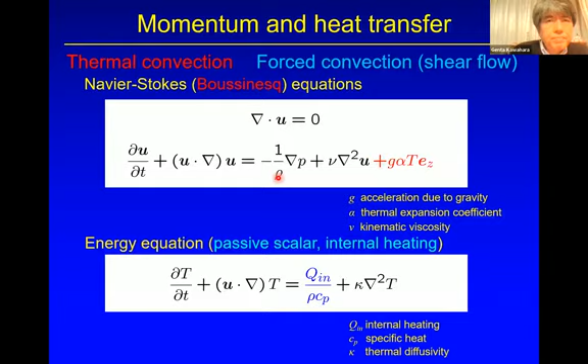And the energy equation, energy budget, is given by the equilibrium between buoyancy power and energy dissipation for thermal convection, and equilibrium between pressure power and energy dissipation for shear flow. These equations are obtained from the Navier-Stokes equation and energy equation.

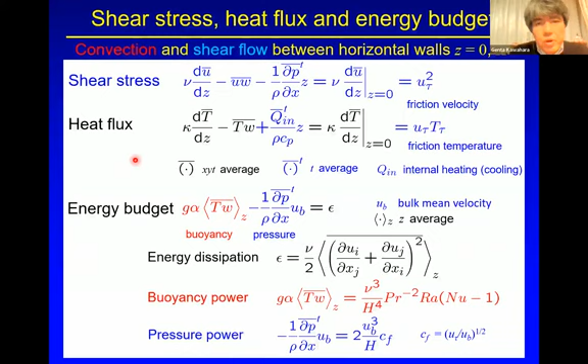And the buoyancy power is related to Rayleigh number and Nusselt number through the heat flux equation. And the pressure power is related to friction coefficient through the shear stress equation. We see similar expressions for shear stress and heat flux. This is the reason of similarity between heat and momentum transfer.

And now I discuss turbulent Rayleigh-Bénard convection. It is a thermal convection between horizontal plates, heated from below, cooled from above. The dimensionless parameter of this system is, of course, the Rayleigh number. And if we increase the Rayleigh number, we see onset of thermal convection and eventually fully developed turbulent thermal convection.

And in the turbulent state, we are interested in the Nusselt number, that is a dimensionless wall heat flux normalized with thermal conduction heat flux. As Srini explained yesterday, in the turbulent state, we see the scaling law of Nusselt number with Rayleigh number.

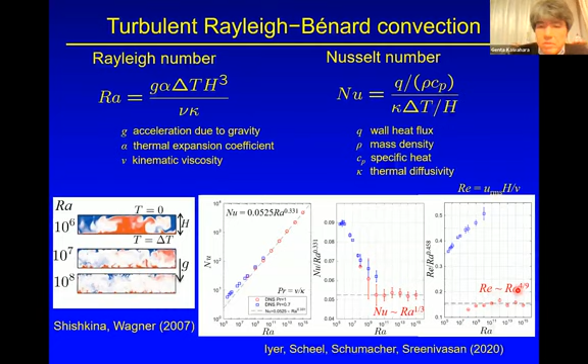The exponent is around 1/3 up to very high Rayleigh number. And we also see the scaling of the Reynolds number based on RMS velocity with Rayleigh number, the exponent of around 4/9. This is what we call the classical scaling, and this scaling has been widely observed in thermal convection, especially the canonical Rayleigh-Bénard convection between horizontal plates heated from below and cooled from above.

For this classical scaling, of course, we already have the theoretical interpretation. Here, we are going to briefly explain this scaling intuitively for the case of Prandtl number around unity.

In the near wall region, we see the thermal conduction layer, and we also have the viscous wall layer. In this configuration, we suppose that Prandtl number is around unity, so the thickness of the thermal conduction layer and viscous wall layer have comparable thickness, in which we see the significance of the effect of thermal diffusivity and kinematic viscosity.

So, in the energy equation, in this layer, we expect the balance between thermal diffusion and advection. And the same is true of the Navier-Stokes equation, or Boussinesq equation, in the wall normal direction. Viscous terms, advection terms, and in the case of the wall normal Boussinesq equation, we have the buoyancy term. They would be comparable in the near wall layer.

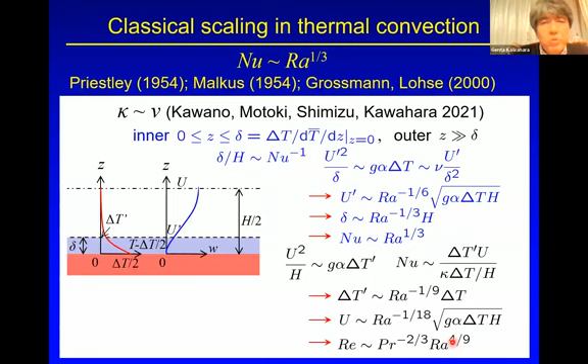This velocity scaling gives us a Reynolds number based on RMS velocity, which is also consistent with the classical scale. This is an intuitive discussion of the classical scaling, and this classical scaling has been observed widely in thermal convection.

On the other hand, there are rigorous upper bounds for the Nusselt number, given by Charlie and Professor Constantin, and by Plasting and Kerswell. In these bounds, we see the factor Rayleigh to the 1/2, and these bounds are much larger than classical scaling or experiments.

These bounds correspond to the so-called ultimate scaling suggested by Spiegel and Kraichnan at extremely high Rayleigh number. This scaling implies that heat flux scales with delta T times the buoyancy-induced terminal velocity, and it is independent of thermal diffusivity or kinematic viscosity.

Supposing this scaling, we consider the energy budget equation. We have Taylor's dissipation law, or dissipation anomaly: epsilon is independent of thermal diffusivity and kinematic viscosity.

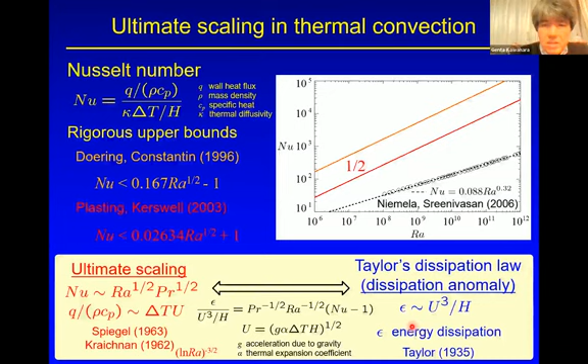The ultimate scaling, however, has not been observed in canonical Rayleigh-Benard convection. So how about convection between cooled or heated rough walls? In this case, we do see the ultimate scaling here.

However, if we further increase the Rayleigh number, what we see is a return to classical scaling. So I have to say that the ultimate scaling in this configuration is confined to a limited range of Rayleigh number.

Yesterday Srini mentioned the possibility of ultimate scaling, maybe in wall-less convection, or convection radiatively heated from below, where we observe ultimate scaling.

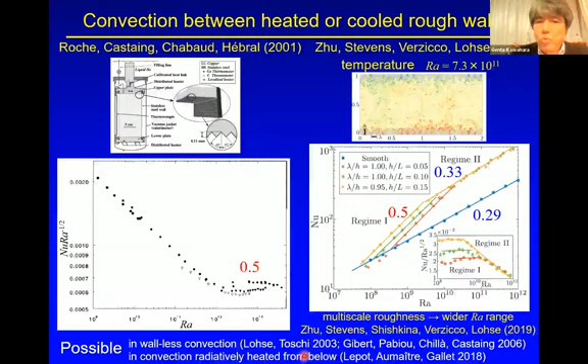But in this talk, I consider the possibility of ultimate scaling in conventional Rayleigh-Benard convection, heated from below and cooled from above between horizontal walls.

Next, we consider the turbulent shear flow in a smooth pipe. In this case, forced convection, we are interested in heat transfer and momentum transfer.

The momentum transfer is represented by the friction coefficient, where U is a forced flow velocity, such as bulk mean velocity. It is very well known that CF decreases with increasing Reynolds number.

In forced convection, we use the Stanton number, which is also a dimensionless wall heat flux normalized with characteristic temperature difference and forced flow velocity.

It is known that similarity appears between heat and momentum transfer, implying a linear relation between Stanton and CF. Actually, in smooth pipe flow, we see a constant Stanton over CF, implying similarity.

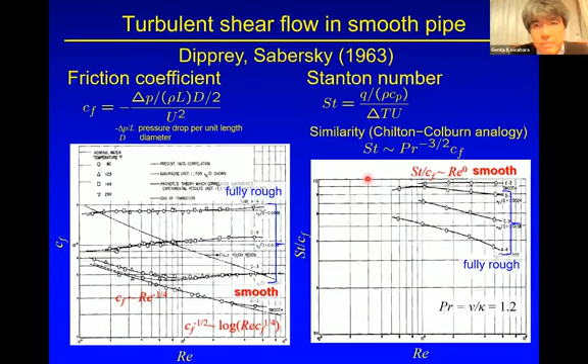So how about rough pipe flow? In the fully rough regime, we can see a constant CF, as shown here.

And we recall the relation between CF and epsilon. Constant CF implies Taylor's dissipation.

How about Stanton number? From the definition of Stanton number, we know that constant Stanton implies the ultimate scaling in forced convection, because delta T and U are independent of thermal diffusivity.

Actually, we substitute the buoyancy-induced terminal velocity here. In thermal convection, we have this expression for Stanton, and the ultimate scaling in thermal convection represents Nusselt scaling with Rayleigh to the 1/2, so constant Stanton.

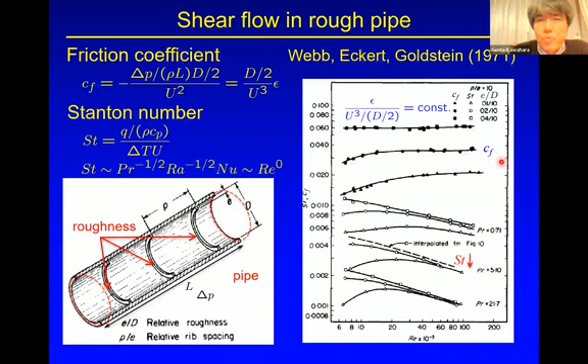However, what we see in rough pipe flow is a decreasing Stanton number, in contrast to constant CF. This is not good in engineering applications, because the introduction of surface roughness just enhances the friction, but not the heat flux.

Now we know that classical scaling has been observed in turbulent shear flow and turbulent thermal convection, and the introduction of surface roughness cannot lead to the ultimate scaling.

We also observe that similarity appears between heat and momentum transfer in turbulent shear flows. Then, where are we heading, or where should we head?

One direction could be pursuing good dissimilarity, that is, greater Stanton than CF. Even in the consistent configuration for velocity and temperature, if we see dissimilarity, the question why is scientifically very interesting.

At the same time, in engineering applications, we would like to have more heat flux and less friction drag. Another direction is the achievement of the ultimate scaling.

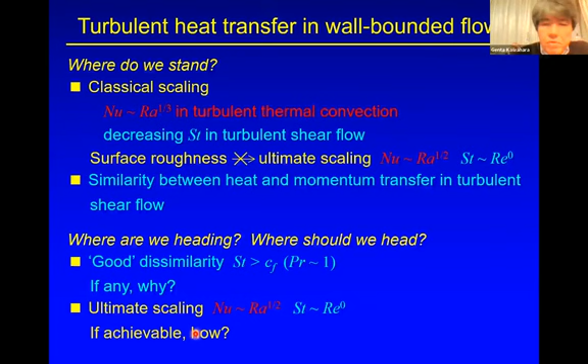We are going to consider these two points. The first question, more specifically, is: can good dissimilarity appear in turbulent smooth channel flow even for Prandtl number around unity? We are now working on this problem.

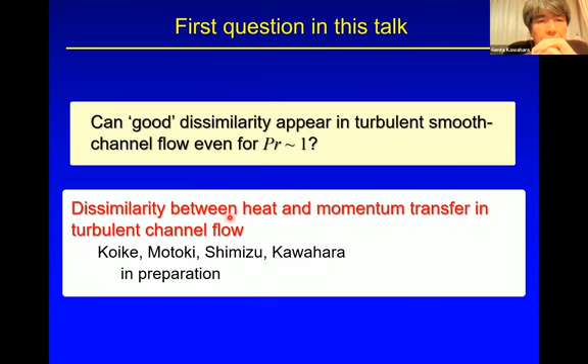Dissimilarity between heat and momentum transfer in turbulent channel flow. I will show these results. As Robinson stated in his well-known annual review paper, there is structural difference in wall-bounded shear flow depending on height. In the buffer layer, we see a number of streamwise vortices, and in the logarithmic layer, we see still streamwise vortex and spanwise vortex. Robinson called spanwise vortex arches, and the wake region is dominated by a number of arches.

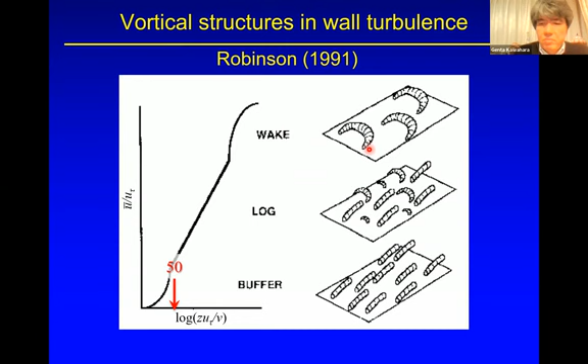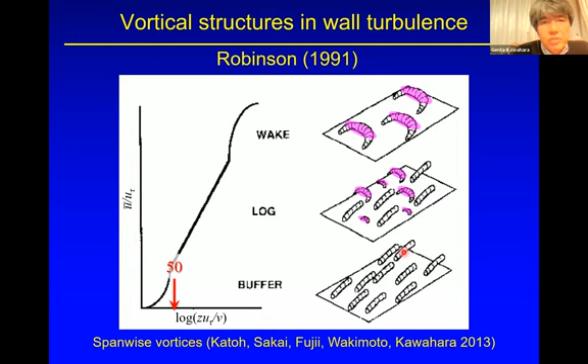And we found the relevance of spanwise vortices with dissimilarity. So in this part, we are going to consider the relevance of this structural difference in the emergence of dissimilarity in channel flow.

Now we recall the rigorous integral expression of Stanton number and friction coefficient. Please note that in this part we shift the wall normal coordinate, Z asterisk, such that minus H and plus H represent the position of the wall. As a consequence of integration by parts of Navier-Stokes and energy equation, we have this expression for wall heat flux and skin friction stress.

Here we see the contribution from turbulence: turbulent heat flux times Z asterisk, and Reynolds shear stress times Z asterisk. Here, TB and UB are bulk mean temperature and velocity, respectively. Dimensionless forms of these equations give us Stanton number and friction coefficient.

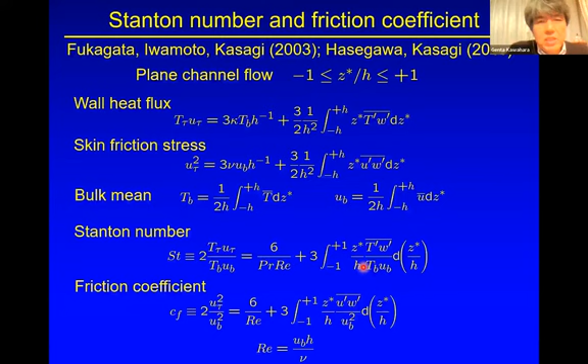Here we see thermal conduction effect, and viscous effect, and turbulence effect. We are considering dissimilarity represented by Stanton minus Cf. If it takes positive sign, this implies good dissimilarity: more heat flux and less friction. So we consider the difference between the two for the case of Prandtl equals unity.

So we just consider the integral here. We have two terms: one is Z asterisk times T prime W prime, and the other is Z asterisk U prime W prime. And we have the governing equation, or evolution equation, for them from Navier-Stokes and energy equation.

Here, we have decomposed the streamwise pressure term, pressure difference, into the mean pressure gradient fluctuation about this one and this one. Please recall that in our configuration, we introduce spatially uniform internal heating corresponding to mean pressure gradient, because we are interested in the emergence of non-trivial dissimilarity appearing from a consistent configuration. So they are consistent.

So if we suppose that at some instant, temperature and velocity are consistent, then these terms are also consistent with each other, so they do not lead to dissimilarity. However, we have here a pressure fluctuation term, and this is the origin of dissimilarity.

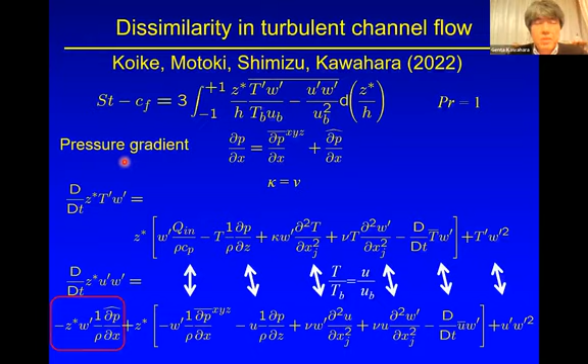Now we relate this discussion with vortical structures. As Robinson stated, we have two typical vortical structures: streamwise vortices and spanwise vortices. In case of streamwise vortices, of course, the low pressure core is elongated in the streamwise direction, so we don't see a significant streamwise pressure gradient. So we don't see significant dissimilarity from these.

How about spanwise vortices? We know that in shear flows, cyclonic spanwise vortices are dominant. In the lower half of the channel, this cyclonic vortex has a spanwise vorticity of consistent sign with the mean shear vorticity. So the cyclonic vortex rotates in this sense.

Upstream of this vortex, we see positive wall-normal velocity and negative streamwise pressure gradient. Downstream of this vortex, we see negative wall-normal velocity and positive streamwise pressure gradient, for negative Z asterisk. So we now know that around cyclonic spanwise vortices, we see the positive term implying good dissimilarity, and the same is true of the cyclonic vortex in the upper half of the channel, of course.

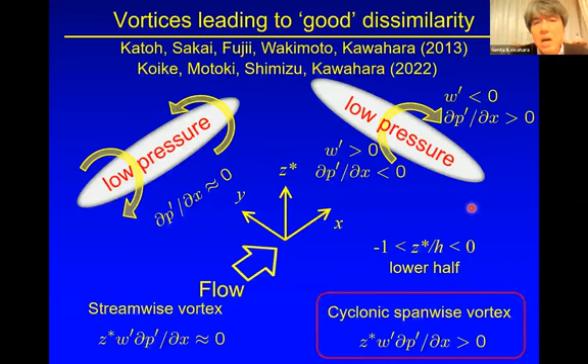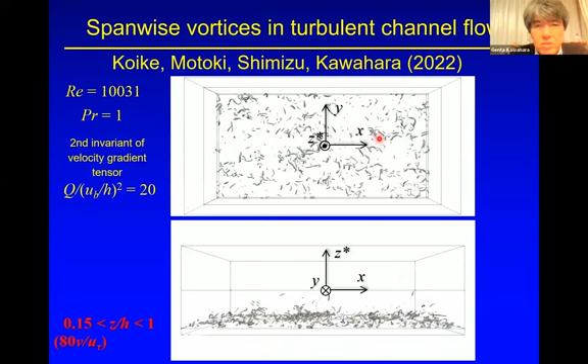So now we are looking into the vortical structure in turbulent channel flow. These are visualizations of the vortices using the second invariant of the velocity gradient tensor, and we see a number of streamwise vortices. However, if we remove near-wall vortices from this field, what we see are more or less spanwise vortical structures, and they are cyclonic.

These cyclonic spanwise vortices actually induce a positive contribution in the integral for ST minus Cf/2. For example, here we see a cyclonic spanwise vortex around which we see the positive integral, and we see the predominant positive contribution from the spanwise vortices. We could see this: good dissimilarity.

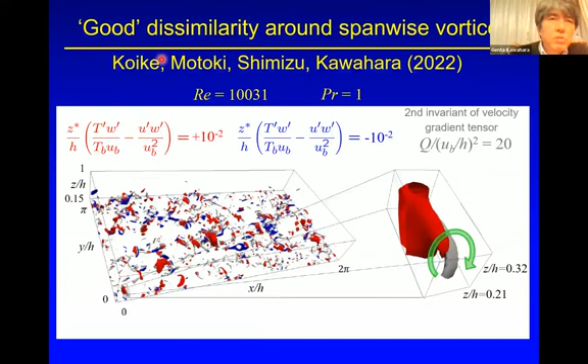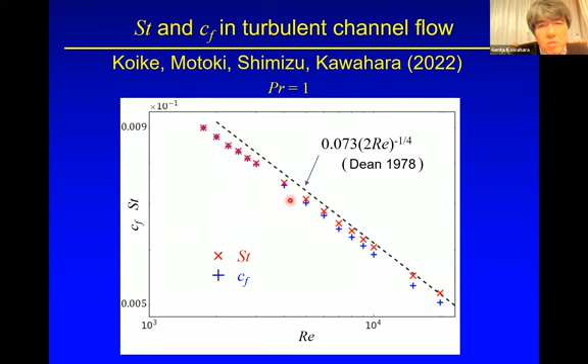And this is CF and Stanton. We see the decreasing CF and Stanton, and they are almost consistent at low Reynolds number. If we take the difference between the two, around low Reynolds number, we see more or less the same Stanton and CF.

This is because at low Reynolds number, the channel is occupied by a buffer layer in which we see dominant streamwise vortices, no dissimilarity. However, if we increase the Reynolds number, we have an extending logarithmic layer in which we have spanwise vortices. That's why we see increasing dissimilarity. Eventually this dissimilarity decreases down to 0 because Stanton and CF decrease with increasing Reynolds number.

So in this way, relative difference could be constant at high Reynolds number. This is because we expect Stanton and CF might exhibit consistent dependence on Reynolds number, so we expect the constant, but it is left for future study.

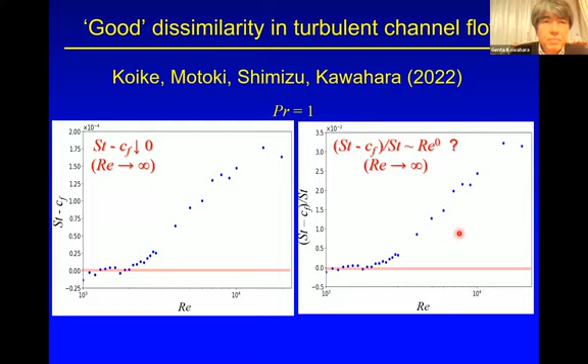So now I'm going to talk about the second question: ultimate heat transfer achievable in thermal convection or shear flow between horizontal or parallel walls.

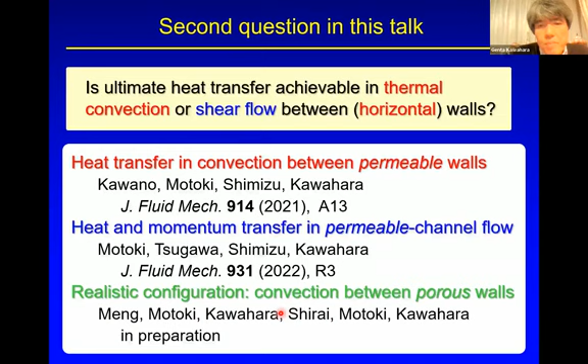In order to achieve the ultimate scaling, we introduce wall permeability in thermal convection and turbulent channel flow. Then we confirm the ultimate scaling in a more realistic configuration, that is, the convection between porous walls.

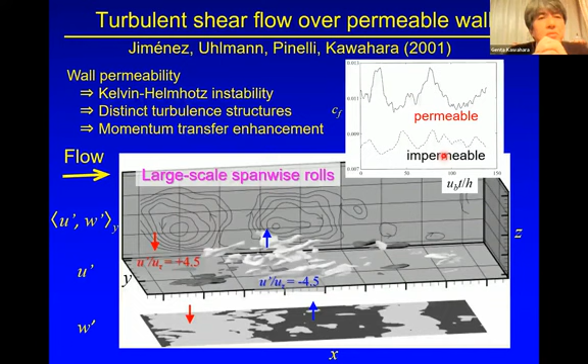A long time ago, Javier and we introduced wall permeability in turbulent channel flow. As a consequence of Kelvin-Helmholtz instability, we see these distinct turbulent structures. They are large-scale spanwise rolls, and these large-scale rolls induce wall-normal velocity fluctuation and largely enhance momentum transfer, as shown here. So I expect the same to be true of heat transfer.

Beta is a positive constant representing the wall permeability, and the straws are oriented in the wall-normal direction. We still expect no-slip conditions, and temperature on the wall is fixed at a constant value. In thermal convection we set higher temperature in the bottom wall, and a consistent temperature in channel flow.

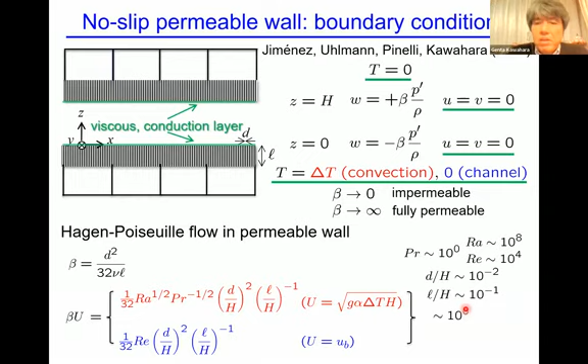Now we consider the thermal convection. In this case, as I mentioned before, temperature is an active scalar, and the permeable parameter is set to these values, 0 and 3. The Prandtl number is set to unity.

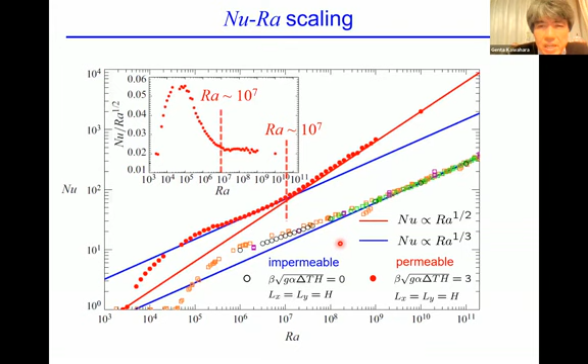This is the result. At low Rayleigh number, we see classical scaling here, and at higher Rayleigh number, above Rayleigh around 10 to the 7, we see ultimate scaling here. In the impermeable case, of course, we see classical scaling at the higher Rayleigh number.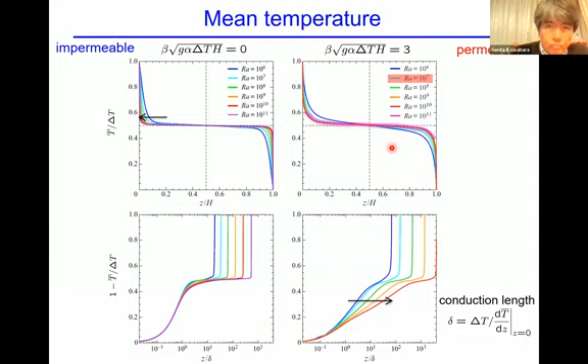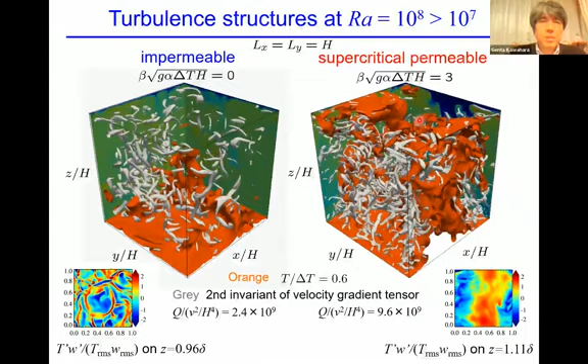What is the difference between the two cases? The origin is the onset of a large-scale thermal plume coming from linear instability. This is the linear critical Rayleigh number in the thermal conduction layer on a permeable wall.

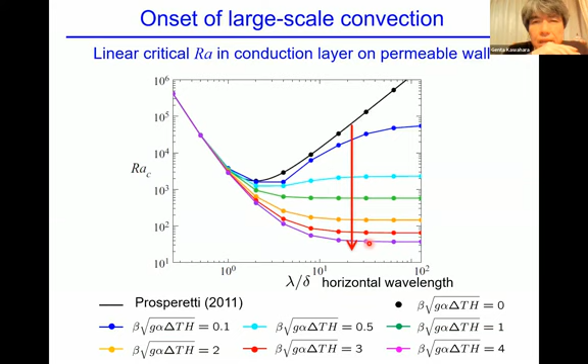In the impermeable case, we see critical horizontal wavelengths comparable to the thermal conduction layer thickness, producing small plumes. However, if we increase the permeable parameter, we see the onset of very large-scale thermal convection, which over the permeable wall can extend to the other wall.

Now I'm going to explain the physical interpretation of the ultimate scaling. In the impermeable wall case, or subcritical permeable case, as discussed before, we see classical scaling. However, in the supercritical permeable wall cases, we see the enhancement of wall-normal or vertical fluid motion.

So now we don't see any big decrease in the near wall region. Wall-normal velocity has a single velocity scale and a single length scale of its change. The thermal conduction layer is still here, but it's very thin, so we see a finite temperature difference comparable to delta T across the

bulk region. So the wall-normal or vertical Boussinesq equation gives us this balance. Of course, we can drop the effect of viscosity because we don't see any big difference in wall-normal velocity.

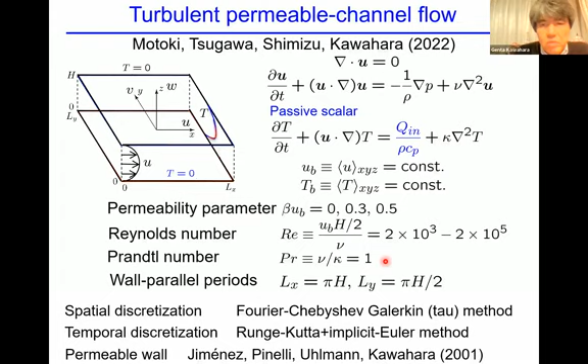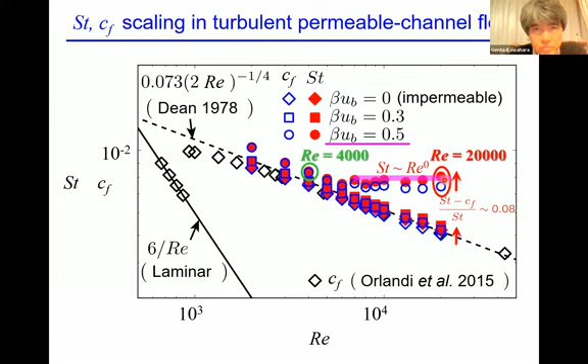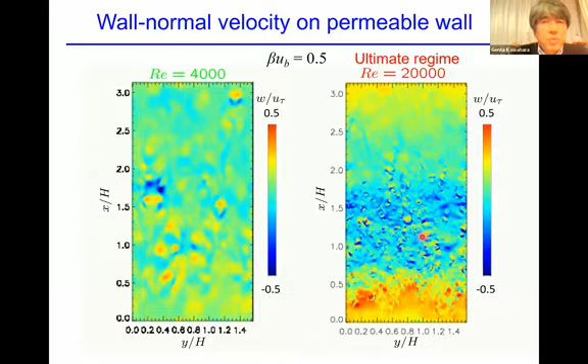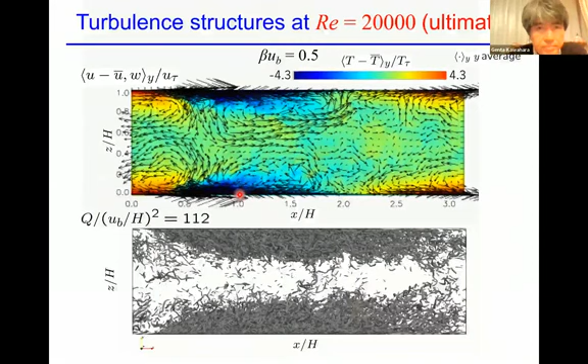And what is interesting for us is that velocity and temperature exhibit more or less the same behavior, implying similarity between momentum and heat transfer. This is because we do not have flow separation.

Flow separation stems from large amplitude pressure fluctuation, and pressure fluctuation gives us dissimilarity. But in this case, there's no separation - that's why we see similarity.

Now we interpret the physical mechanism of the emergence of ultimate scaling in channel flow. In our prior work, we identify the origin of the large-scale span-wise rolls as the Kelvin-Helmholtz instability in a free shear layer type.

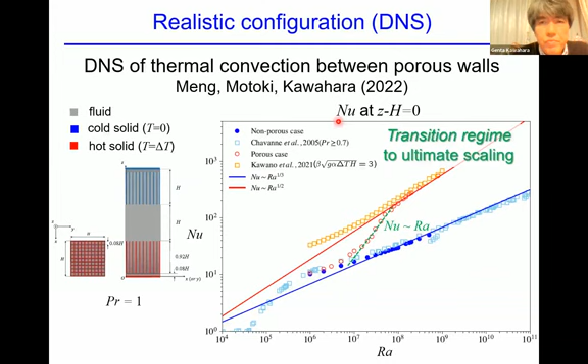We have observed the same result in our experiments of thermal convection between porous walls. As you see, the ultimate scaling and the classical scaling, and in between we see this transition regime. Now I'm going to explain why we see this transition.

At lower Rayleigh number in the transition regime, we see vortical structures, but they are in the bulk region, not in the permeable wall. At higher Rayleigh number, in the ultimate regime, we see a bunch of vortical structures in the porous wall associated with very high local energy dissipation.

So at low Rayleigh number we would be free from vortices and dissipation. Maybe at low Rayleigh number, in the transition regime, the flow in the porous wall or hole is laminar. If so, we again have Darcy's law here.

So beta U for fixed geometry, and U is the buoyancy-induced terminal velocity, increases proportional to Rayleigh to the 1/2. So we have the ultimate scale, but in this case, if we increase the Rayleigh number, the wall permeability also increases, so the prefactor increases with increasing Rayleigh number. Therefore we have an effective exponent greater than 1/2.

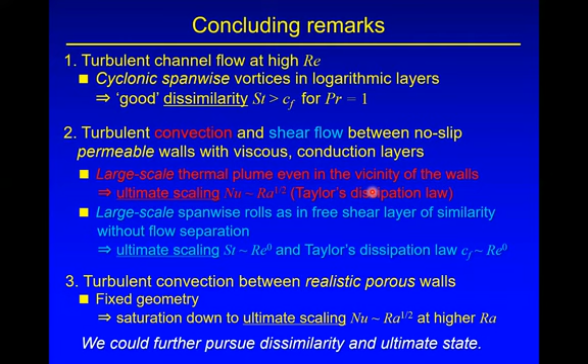Okay, here I am. Thank you very much, Genta, for the very interesting talk. In the porous case, what is the height you used for computing things like Rayleigh numbers? Presumably you ignored the porous part because that's really not part of what you think is the dynamics. But in fact you can see in your pictures that there is some dynamics going on in the porous part itself, although obviously not as vigorously as in the rest of it. So thank you — isn't that something to worry about? But thank you very much.

Let me finish with one more question tagged on. Do I understand you right, that if somehow we destroy the momentum boundary layer and do almost nothing for the thermal boundary layer, you can get ultimate scaling?

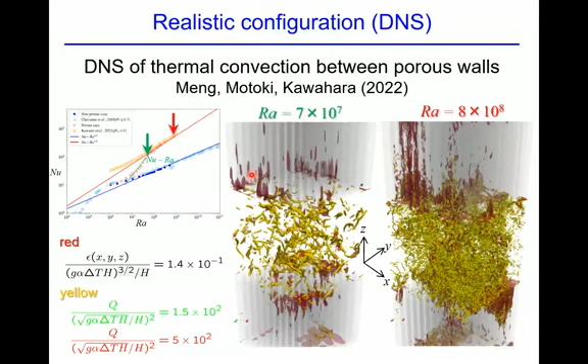I'm sorry, I don't understand your second question. Could you please repeat that? The second question was, to attain this ultimate scaling, you have to interfere with the boundary layers in some fashion. It seemed to me from what you have shown that what is more important is the interference with the momentum boundary layer rather than with the thermal boundary layer. Do I understand it right or not?

That's the question. I think both should be necessary, because firstly, the Kelvin-Helmholtz type free shear layer instability could give us the vortical structures, and that could give us the Taylor's dissipation law. And if we see the similarity, that implies velocity and temperature behave in a similar way. As a consequence of this similarity, we see the constant Stanton number, that is the ultimate scaling. So we see the similarity between the two, and we need both effects, on momentum transfer and heat transfer, I think.